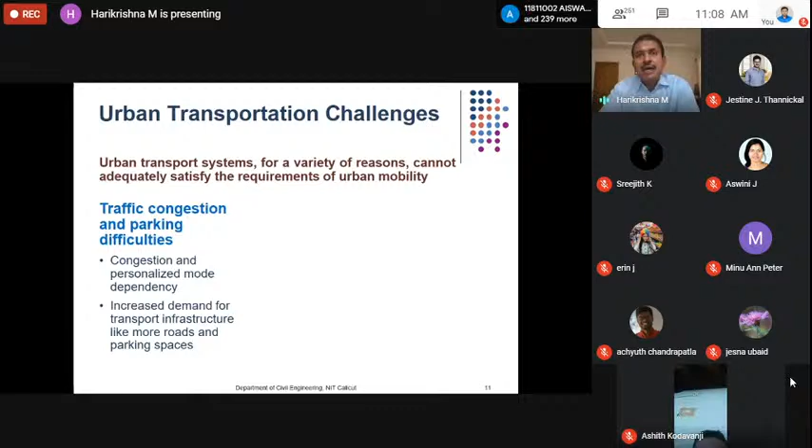This leads to problems associated with congestion on the roads, personalized mode dependency, and an increased demand for road infrastructure, which means more roads or more parking spaces. For example, this is a plot of parking rates in the central business districts of cities across the world. You see that London has a very, very high parking fee.

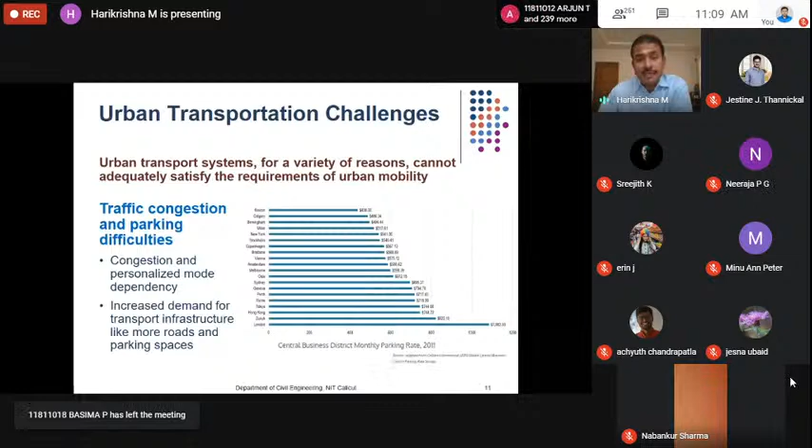And of course, an increase in parking fees is one of the traffic system improvement measures taken up by most countries around the world to reduce the demand so that the supply can take care of the demand. We have longer commuting times. Residents of a particular city take more time to move from where they live to where they work.

And given that the areas surrounding an urban area would be more affordable for people to set up their residences, you have people who commute every day. So there is an exchange of commuting time for housing affordability. More people are likely to commute longer distances, which again means a demand for the transportation system, especially when they have to move from where they live to where they work.

You have very inadequate public transportation systems. They are either overused or underused, depending upon the time of day. You have periods of peaks and troughs in the demand. During peak hours, you have more people causing discomfort and a temporary surge in demand. So during non-peak hours the demand remains less, and during peak hours the demand remains more.

We again have difficulties with non-motorized transport, especially vulnerable road users like pedestrians, bicyclists, and so on. Any development aimed at these vulnerable road users would always come at a cost to motorized transport, because you need to set apart a certain space for them within the existing carriageway. So what do we do? That's always a big question.

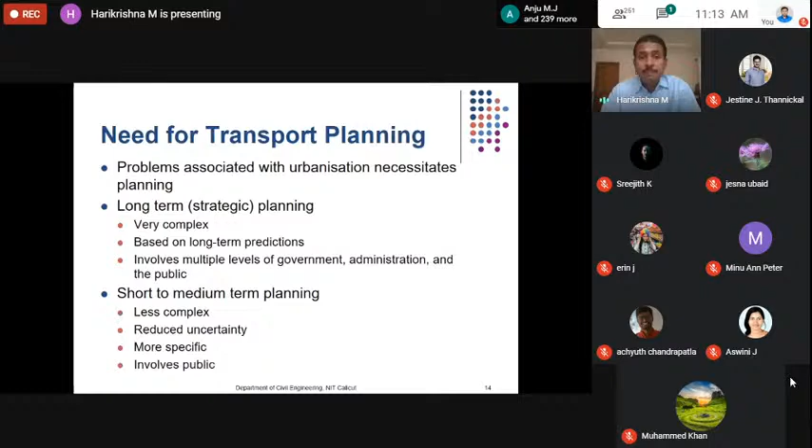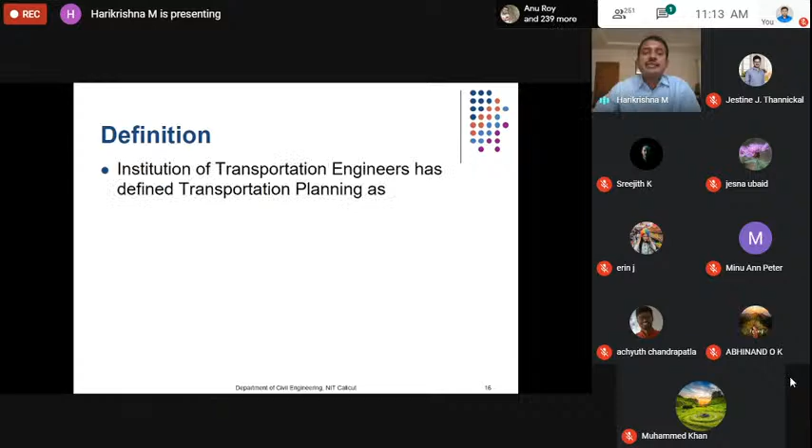Now, what is transportation planning? The Institution of Transportation Engineers has defined transportation planning as a collaborative and participatory process which involves agencies, organizations, and the public in a comprehensive look at the national, state, regional, and community needs relating to the demographic characteristics and travel patterns of a given area.

In other words, transportation planning is expected to look at how population changes over time. What are the changes in characteristics of the population? How do you expect the travel patterns to be? So we normally do transportation planning especially with respect to an urban setting, where there is a defined boundary to the particular urban area, and people travel from one part of the city to the other for various purposes. We'll come to that in detail.

It shows how these characteristics would change with respect to time. That means, how does demography change? How do travel patterns change? What should be done in the transportation system so that these changes in demographic characteristics and travel patterns can be accommodated? So how do you change the system? What new systems can be added, or how can an existing system be improved, so that a change in the demography, in population, in the travel pattern can be suitably accommodated?

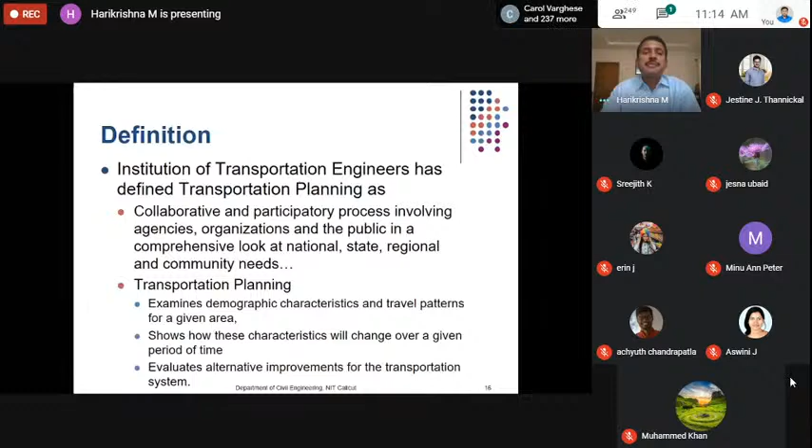So essentially, transportation planning provides information that is required to choose among various alternative strategies aimed at improving system performance. If you take an urban area, you would want people to travel from one part of the city to the other in a very safe way. You need them to travel in such a way that the travel time is less. Transportation planning essentially comes out with plans which help us choose between strategies aimed at improving system performance. So essentially, transportation planning is future-oriented.

As I told you in the previous slide, it involves both short-term and long-term planning. Of course, uncertainty in predictions is always inherent in any planning process. And any planning process is also expected to balance between the short-term and long-term benefits. Short-term benefits could be perhaps a reduction in travel time, but the long-term benefit or cost could be associated with an impact on the environment, impact on the wildlife, etc.

For example, when you propose a new road connecting Kerala and Bangalore against the alternate route, the long-term aspect could be the environmental impact assessment that needs to be done. The short term perhaps could be how much travel time can be reduced and how to quantify the savings in travel time. Okay, so that's what we essentially do in transport planning.

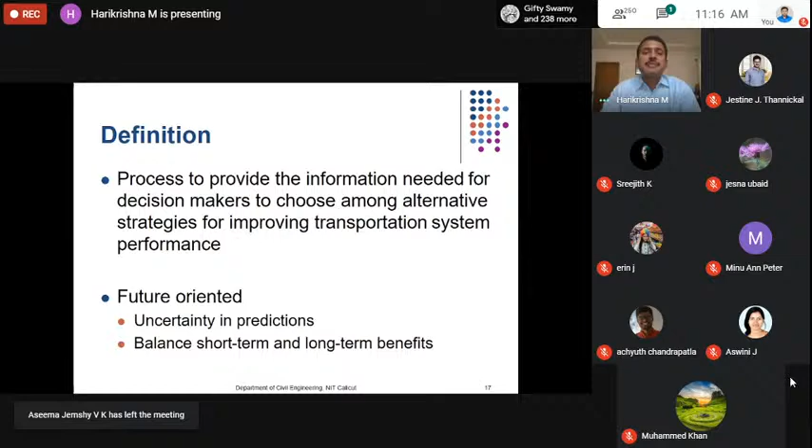Now, so essentially we have seen that any transportation planning is expected to improve a transportation system. I would like to have a definition about the transportation system. It's a pretty big definition, but I'm sure it will be quite easy for you to understand that any transportation system can be defined as an optimum combination of fixed facilities.

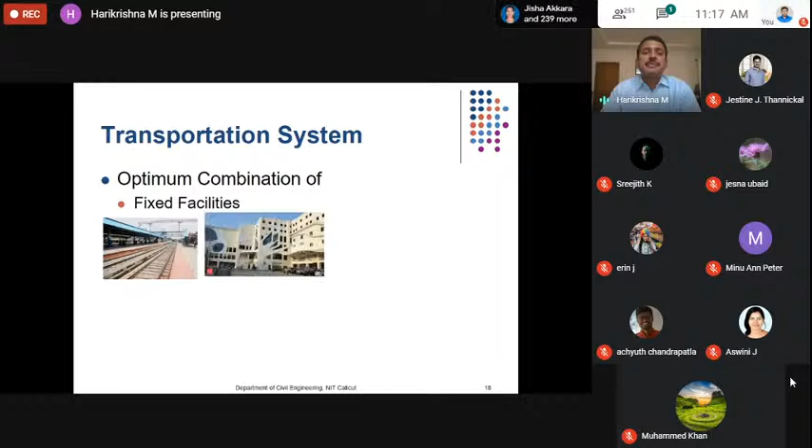Now, fixed facilities could be railway stations, it could be the tracks, it could be bus depots, as you see here, it could be harbors, ports, it could be airport terminals, it could be pipelines. In other words, fixed facilities cover all range of modes with respect to water, with respect to air, with respect to rail, with respect to road, and also with respect to freight movements.

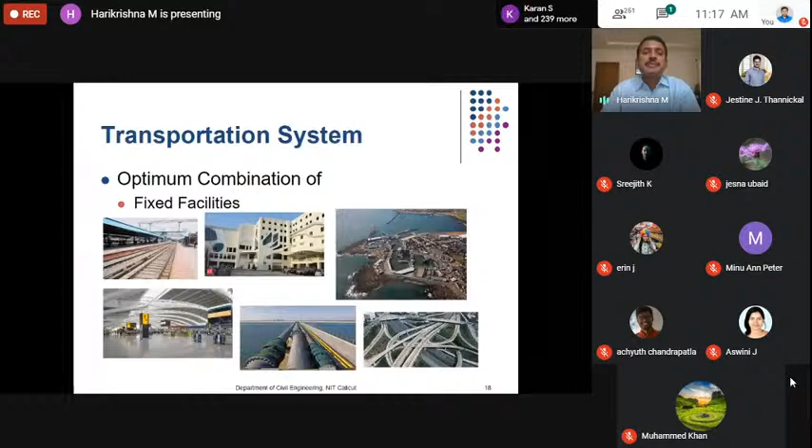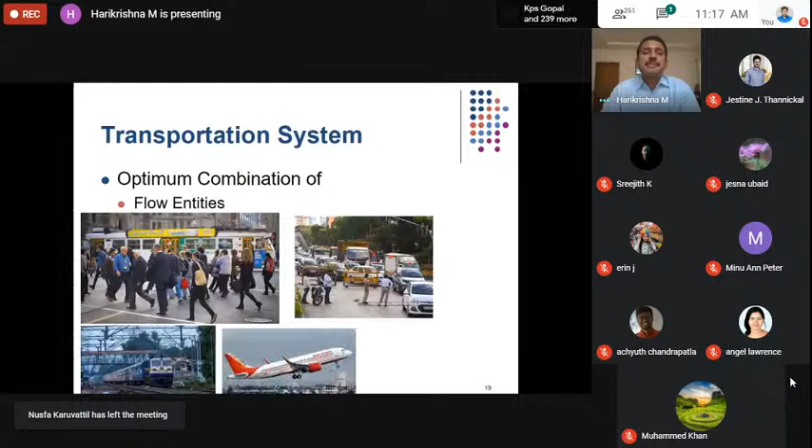So a transportation system, therefore, is an optimum combination of these fixed facilities, flow entities, which could be pedestrians, it could be vehicles on the road, it could be railway trains, planes, and of course ships, covering all modes. Operational plans. What is the timetable at which these things move? It could be a railway timetable as it's seen here, it could be a bus timetable, it could be a ship timetable.

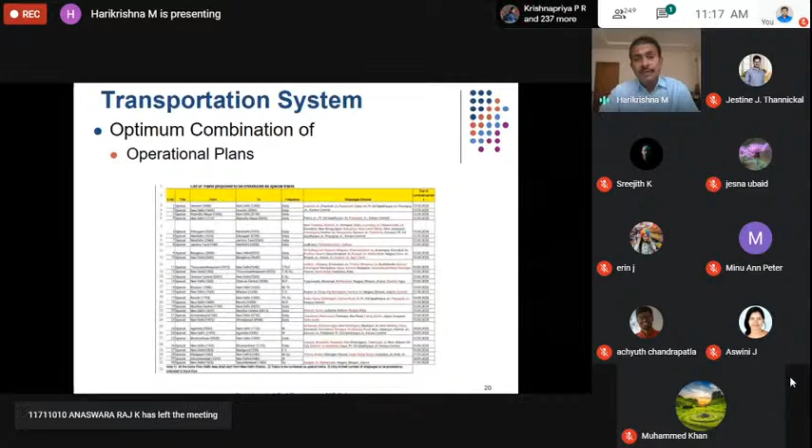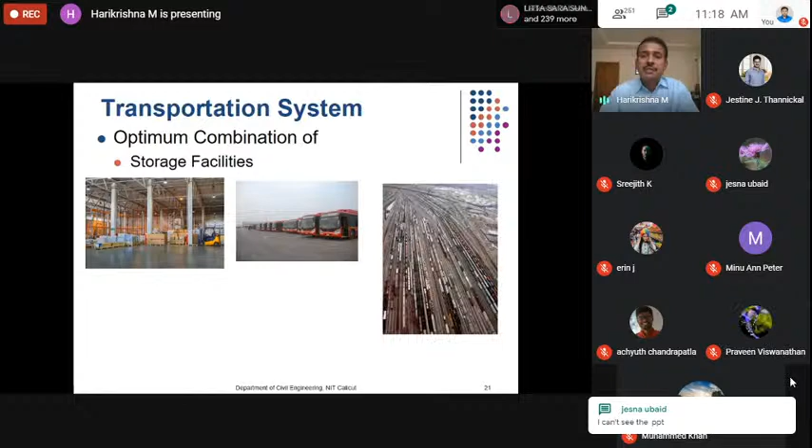Storage facilities, essentially associated with freight, wherein you talk about railway yards, where you talk about aircraft hangars, or you talk about berths for ships. So an optimal combination of fixed facilities, flow entities, operational plans, and control systems.

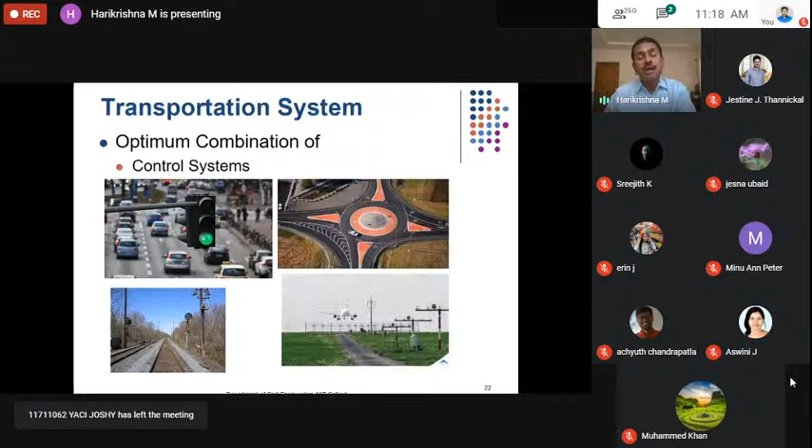The control systems like a signal, it could be a roundabout, it could be signaling systems in railways, it could be automatic landing systems in case of flight, which are designed to improve the accessibility by overcoming the friction offered by the geographical space in a safe, efficient, and convenient manner. So essentially, all these systems that are put in place are designed to improve accessibility.

Accessibility means ease to access a particular facility. How does it do that? It does this by overcoming the friction offered by the geographical space. Now, essentially, we have activities that are spatially separated. The place where you stay is not the same as the place where you work. The place where you stay is not the place where you study.

So you have a space which lies between these places where these activities are undertaken, and therefore you require a system so that this friction that is offered by the geographical space can be overcome very easily in a safe manner, in a crash-free manner, in an efficient manner with less travel time or maybe less travel cost, and also in a very convenient manner, which provides space and time utility to the desired activity.

Now, this is something that you need to understand, that when I say space utility, I'm reminded of an instance which was quoted in the book Freedom at Midnight by Dominique Lapierre and Larry Collins, who talk about the partition of the Indian subcontinent. So the authors of that particular book say that when India was partitioned into East Bengal and India, all the jute producing areas became concentrated in East Bengal, while all the jute processing factories became concentrated in West Bengal.

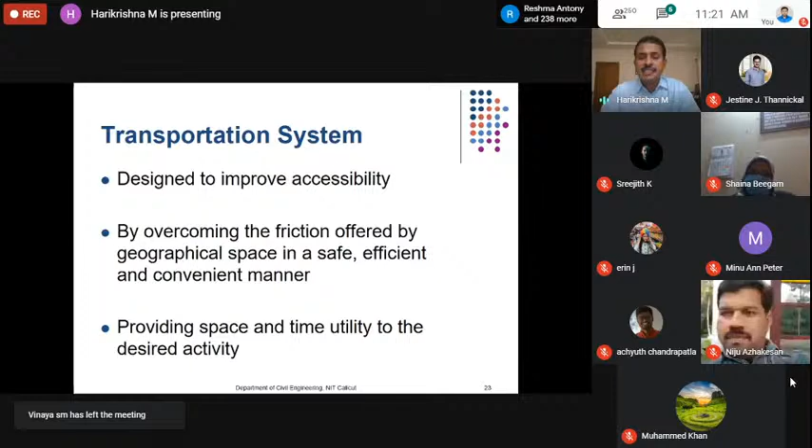So you need to have systems put in place, refrigeration in this particular case, which helps you to transport milk from the place where it is processed to the consumer's hand. So you need to have systems in place so that the time utility is given to the desired activity, or the objects or the commodities can be used by the people in sufficient time, while maintaining the environment and looking for sustainable alternatives requiring less resource consumption.

So these two aspects, of course, are inherent in any system, because maintaining the environment and reducing the load of pollution on air, on water, on land, etc., becomes extremely critical. And you also need to look at resource alternatives which are sustainable, such as the shift perhaps to electric vehicles or the shift to CNG and so on, which requires less cost. So a transportation system is expected to provide you this.

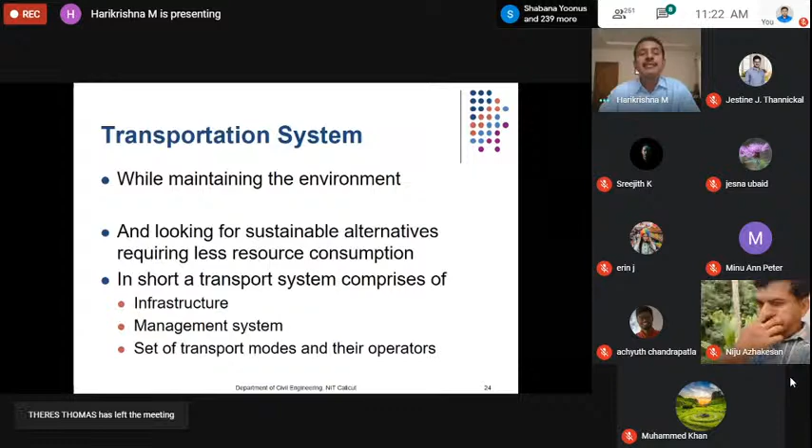Therefore, in short, the transportation system comprises of an infrastructure that is being put in place. You have a management system which manages the movement of flow in a particular network, and you have a set of modes and their operators who run these particular modes. Now, how to design this transportation system is what we do in transportation planning.

Now, some of the aspects that we look at in transportation planning is urban travel demand modeling. We have always seen that urban population is increasing. Therefore, there is a need to understand the travel demand with specific reference to urban areas. And it's also required for us to project this travel demand to the future, so that the increase in population can be considered in the design. We have public transport planning and design, which also forms a part of transportation planning.

You have freight demand modeling, because you have movement of goods from one part of the country to the other. It could be through land, rail, water, or air. A separate part of transportation planning is freight demand, both for perishable goods and for non-perishable goods. And of course we have systems wherein there are a combination of modes. It becomes quite complex in that way.

You have the roll-on, roll-off systems, wherein trucks can get onto the chassis of railway carriages, and they can be transported over rail. And once it reaches the destination, they can just roll off to the required destination, providing door-to-door connectivity. So you have such systems in place which need to be designed. You need to look at the environmental impact assessment of projects, especially.

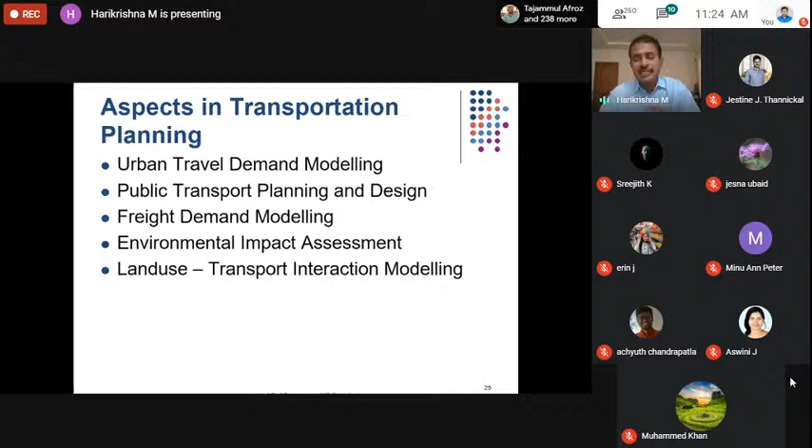You need to have modeling or understanding of the interaction between land use and transportation. Land use has a profound influence on transportation systems. A change in land use would essentially cause changes in transportation systems also, and vice versa. So it is said that in our country, we allow the land use changes to take place, and then we introduce a transportation system. In most of the Western countries, it is the reverse: you build a road and the land use comes later.

So you have transportation system analysis and design, which talks about how to analyze a system in place and how to design a system. We have transport economics, because any major transportation project always involves money. Therefore, it's essential that we quantify the benefits, the cost, and see what returns you would get out of a transportation project.

We also have planning for parking areas, since parking is an essential part of transportation. It is found that almost 95% of the time a vehicle is on the road, it is stationary. In other words, it just doesn't move, which means you require spaces for it to be parked. So parking planning, and of course many more. So this is a broad gamut of topics which come under transportation planning. Depending upon the particular project in hand, this would be looked at in its own perspective.

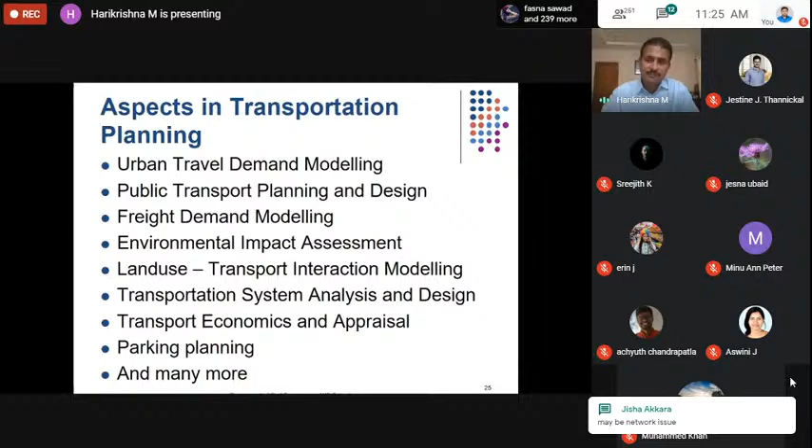Now, I would move forward to how to do this transportation planning. Depending upon the time that is available to me, perhaps I would go in detail into the urban transportation planning process. Otherwise, I would give you a broad overview of what this is like.

Now, transportation planning always tries to maintain an equilibrium between the supply and the demand. Say, for example, in road transportation, the supply would be the roads, or perhaps the vehicles. The demand would be the number of people who would be using it.

So the role of transportation planning is to ensure satisfaction of a certain demand, if I put it as D, for the movement of persons and goods having different trip purposes. Now, one definition is that a trip is nothing but a one-way movement between an origin and a destination.

So people move for different purposes. It could be for work, it could be for education, it could be for recreation, it could be social trips like visiting friends or relatives, it could be religious trips, it could be medical trips. So people move for different trip purposes at different times of the day and of the year. Now, goods movement also occurs at different times of the day and different times of the year using

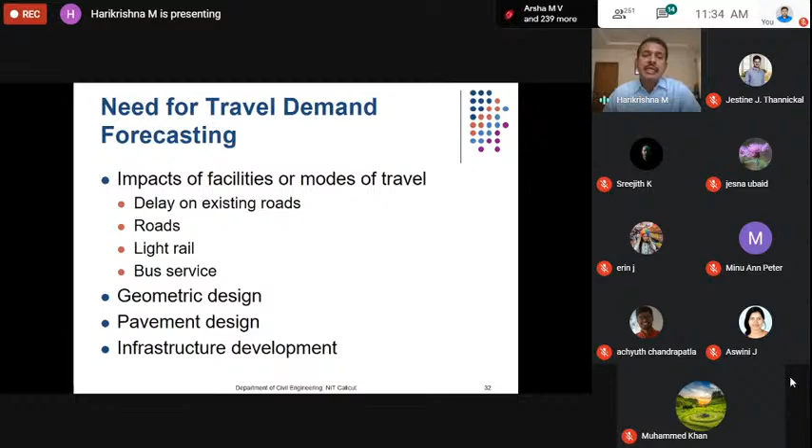Now, whenever we talk about an urban area, though freight demand forms a part of it, we'll restrict today's discussion only to traveler decisions because it's people who move quite a lot. Therefore, the decisions of the traveler become extremely important. So what are the types of decisions that a traveler makes?

The first traveler decision could be at what time of the day do you go? When do you start for shopping? When do you start for school? When do you start for work? Of course, these traveler decisions are more or less predictable because you know your school timing and your work timing. But for shopping, for example, by homemakers, there could be a choice.

Where exactly do you go? What is the destination? Where do you go for shopping? Do you go to the ordinary grocery store near your house, or do you travel 5 kilometers to a shopping mall or to Reliance or any other big shopping center? What mode do you use to travel? How do you get there? Do you use your two-wheeler or your car? Or a public transportation system? Do you walk, or do you use your bicycle?

Which route do you take? You have multiple routes to go from an origin to a destination. Which particular route do you choose? Now, these are the decisions which a traveler makes. Please remember that an aggregation of these traveler decisions is going to influence the demand on the system.

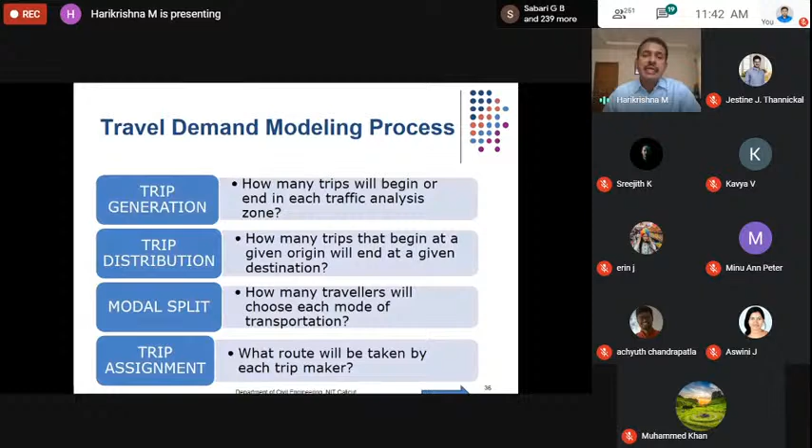This is something which is in fact an aspect in which transportation planning plays a major role. In fact, since cities of the future are going to be bigger and more crowded, we need to have smart transportation systems which help you to cater to this demand. Now, will these transportation systems be smart enough to cater to this demand? Will we have more patronage for public transit systems, or will we have autonomous and connected vehicles on the roads? These are questions which any of you should be able to answer.

So the future of transportation systems probably is somewhere in between these two. That means somewhere in between a complete reliance on your public transit systems or a complete reliance on autonomous vehicle systems, but blended autonomous vehicle systems used for personal modes and on-demand solo or ride-sharing transportation solutions, with public transport, microtransit and alternative mobility options like e-bikes and scooters.

So when I say on-demand solo or ride-sharing transportation solutions, it means your on-demand services like Uber or Ola, which will help to complement the public transportation systems and use microtransit. Microtransit is also a form of on-demand systems. And also you have systems like e-bikes and scooters, which tend to reduce the impact on the environment.

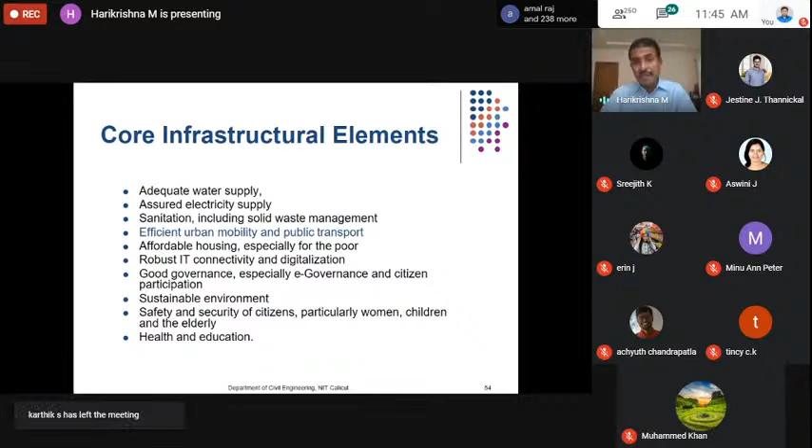I would also stop, perhaps it's going to be the time, on uncertainties in predicting the future. Though we talk about transportation planning, which is essentially future oriented, there are certain uncertainties. Uncertainties with respect to the economy, with respect to fuel usage, availability of fuel, and of course population growth. We have analytical limitations also to some extent, because we have inventory issues, data issues, forecasting issues. Performance measures themselves could change.

We also have influence of politics in our transportation planning process, because many projects could go haywire with the negative influence of politics. So that's also one aspect. It's a reality. We need to face a particular reality.

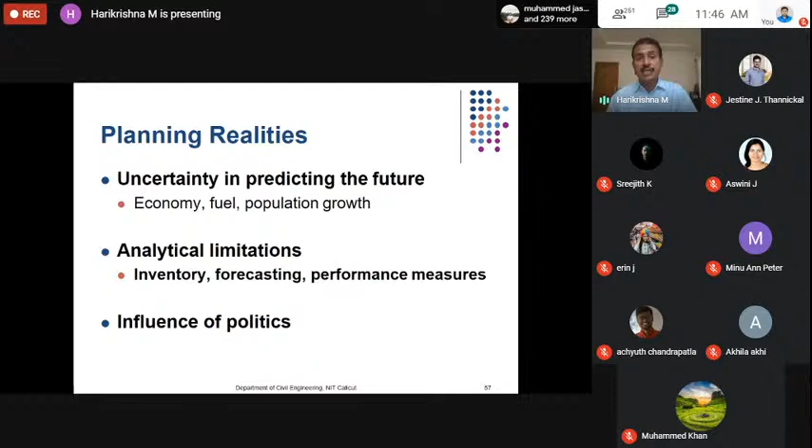And I would like to close with a quote by Stephen Hawking. He said, "Remember to look up at the stars and not down at your feet. Try to make sense of what you see and wonder about what makes the universe exist. Be curious, and however difficult life may seem, there is always something you can do and succeed at. It matters that you just don't give up." Okay, so I feel it's a very apt message for these days.